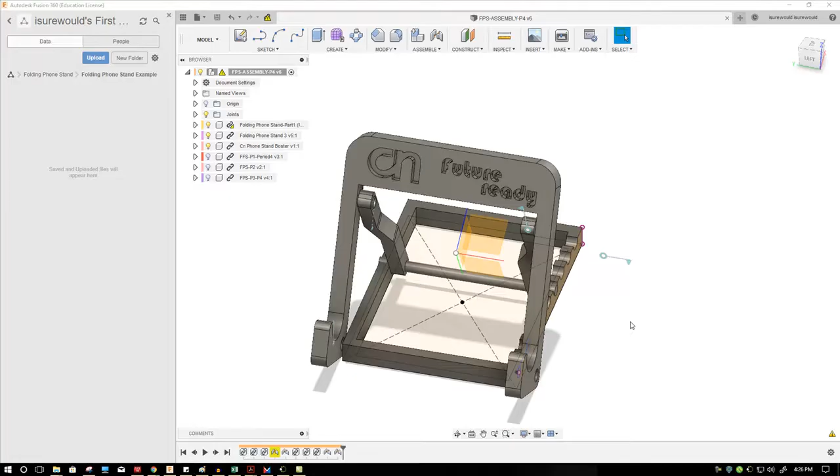Now I like this because it's very doable and it can be customized a bit, and all my students seem to be able to make one. And then of course after that it could be 3D printed on a 3D printer.

Alright, so let me close that one out. Now for this project we're going to make three separate files.

So we're going to start out by doing the sketch rectangle, center point rectangle. Now it's best to create this on the top plane, so I'm going to click on that, and now design from the center.

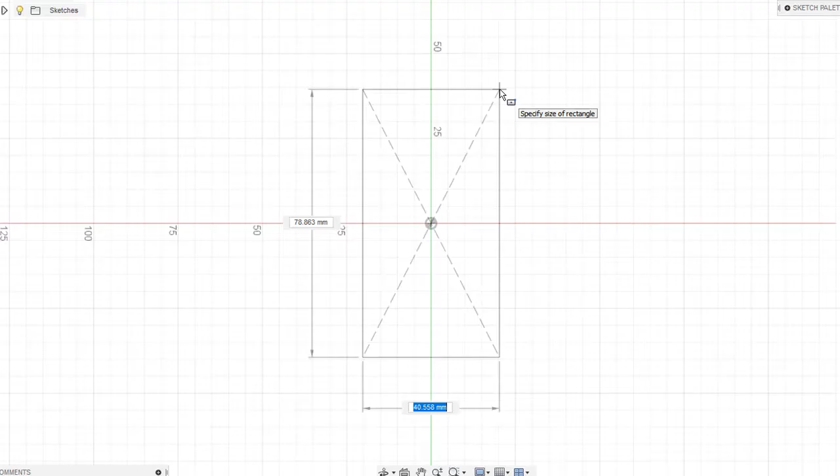Now this one we're going to make it 110 high and 79 wide. So I'll start with 79, press the tab button, jump up to 110. That's my initial shape.

Now we're going to choose the offset tool. You can tap O on the keyboard for that as well. And I'm going to offset it on the inside of the first rectangle. That's the main thing to know, and this is going to offset 5.

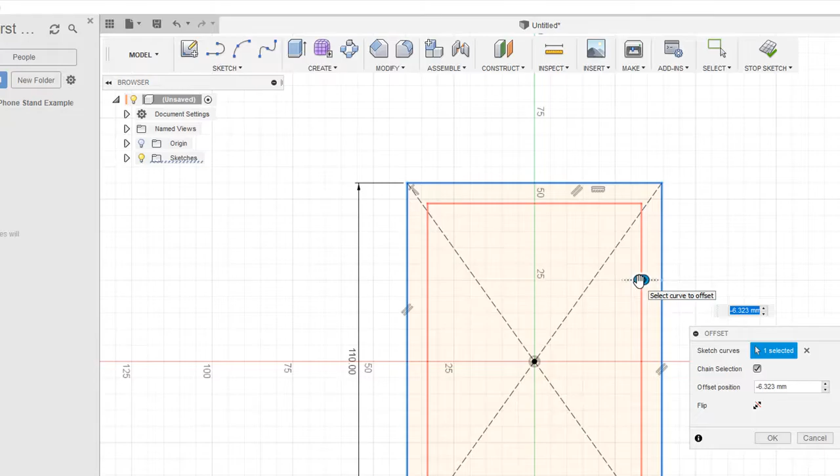Sometimes the 5 and the -5 are different. Often when my students do it, it's a +5. Just make sure the offset goes on the inside of the rectangle.

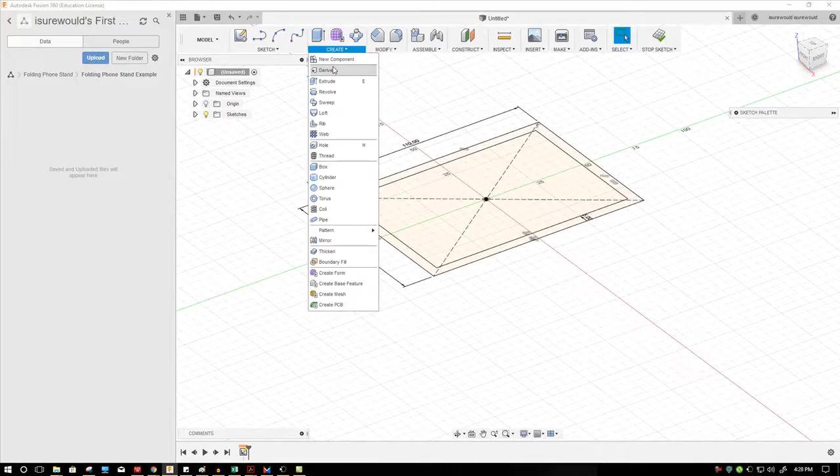From that we are going to start our extrude. Choose the create extrude button, and extrude this shape up 9 millimeters.

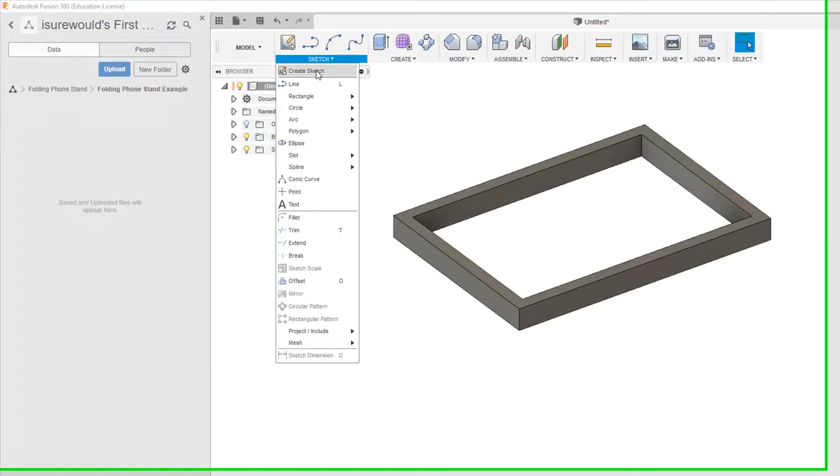At this point we're going to design a new sketch on the side of this shape, so I'm going to come down to the circle tool, and I'm going to start out with a 2-point circle. Click on the side of this shape, and then I'm kind of going diagonally down across this for the circle.

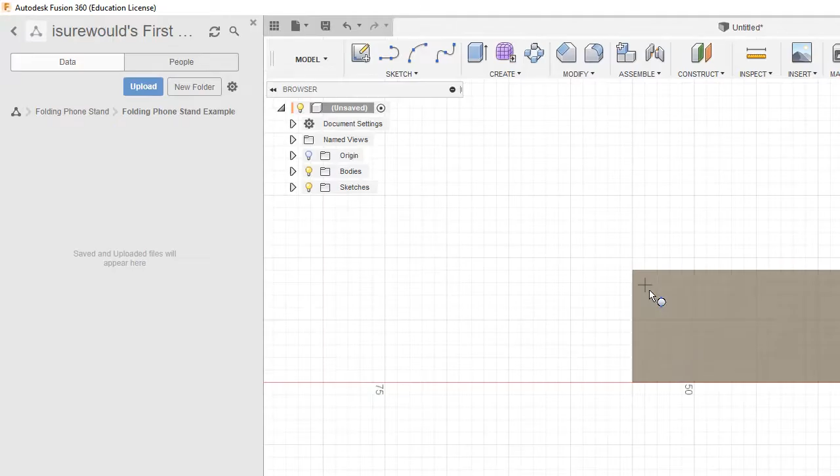So I'm bringing it down about 2 of the millimeters. I can tell because it's 2 squares there, and then I want this one to be 5 millimeters as well. Now I'm going to make another circle using the center diameter circle.

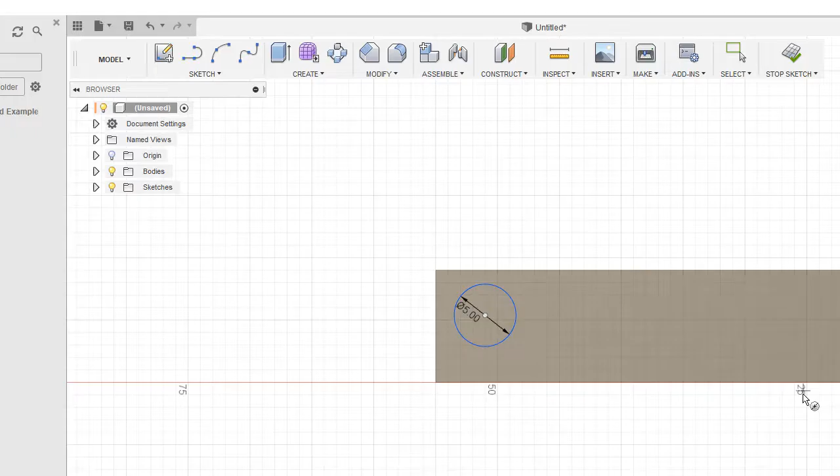This one I'm going to bring over to about the 25 millimeter mark and then bring it up. This is going to be a diameter of 7 millimeters. And notice it's right, the center is right on the edge of the shape. So you'll see that.

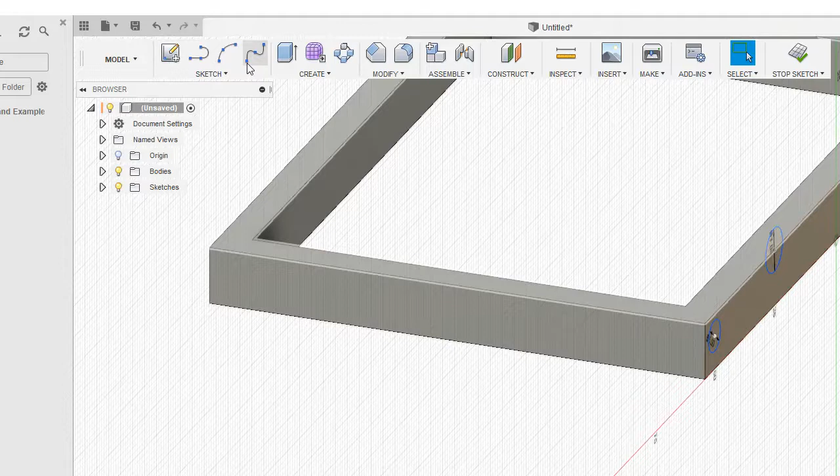Okay, from this point we're going to extrude first circle out 5 millimeters. Click OK. Sketches tend to automatically turn off when you extrude, so check that sketch, turn it back on if you need to.

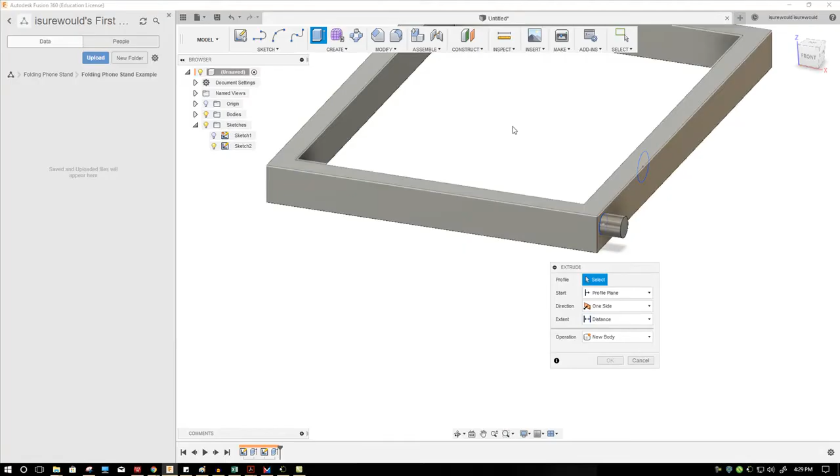This second sketch I'm going to extrude cut now across and make a notch.

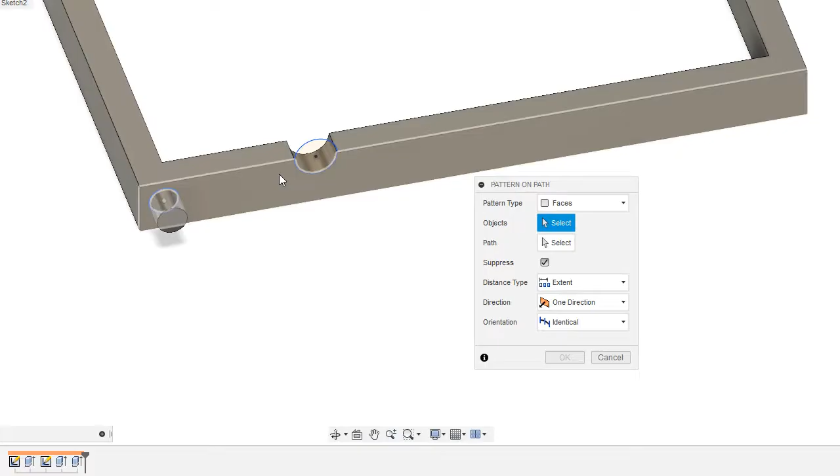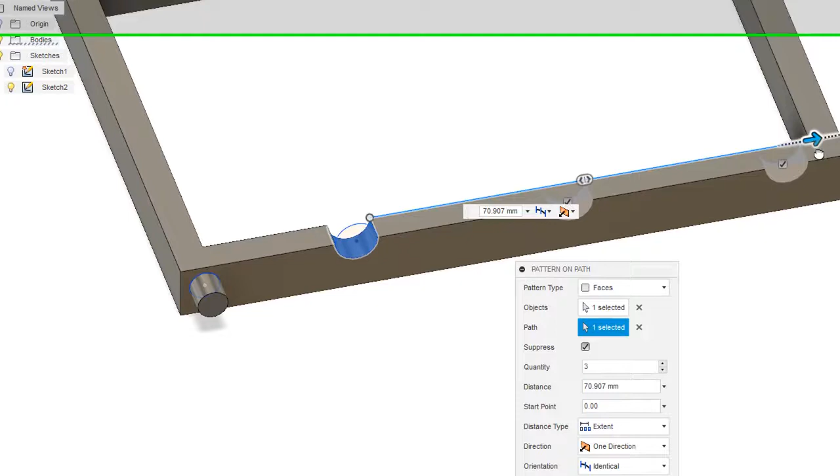Okay, from this point we're going to do a create a pattern on a path. I'm going to leave it set for faces and then select the objects that I want to pattern. Select the path. Prefer to use this inside line, and then drag it this way. Now if I leave it the way it is right now, it's going to make 3 notches. I want more than that. Let's try 9, and then it'll cut 9 notches out of that.

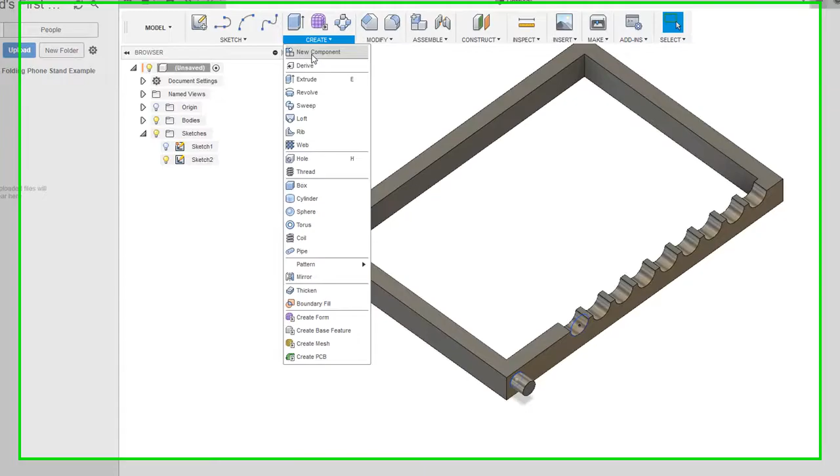Alright, at this point I can take and I'm going to go ahead and mirror these shapes to the other side. So I'm going to do create a mirror and select all the faces that are going to be affected. Unfortunately, this is the best way to do it. I normally like to minimize the number of items to select, but this is the best way.

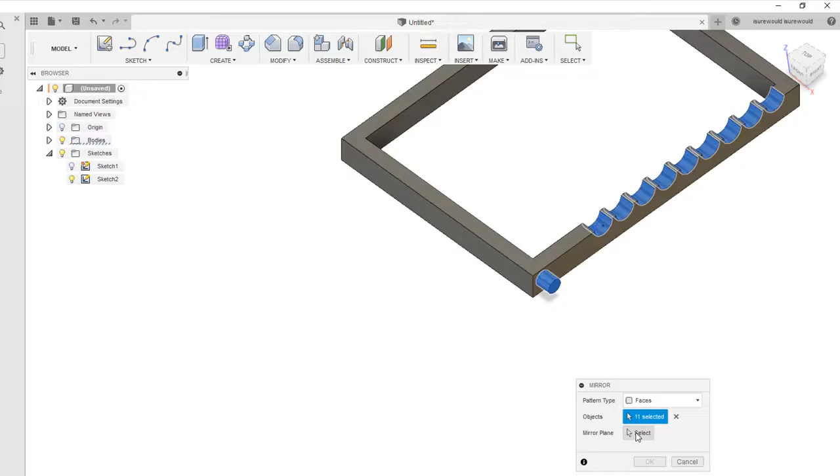Select the mirror plane, and you'll see the origin shows up. This is why we are using the centered rectangle. It allows us to use the origin for our different mirrors. And you can see it copied that to the other side.

From this point, we're going to go to the Modify menu, and we're going to fillet some of the edges. I'm going to choose this edge, and then matching inside edge there, and then the inside edge, and the matching outside edge. It'll actually select through the shape if you just point to the general area where it should be. Round those off.

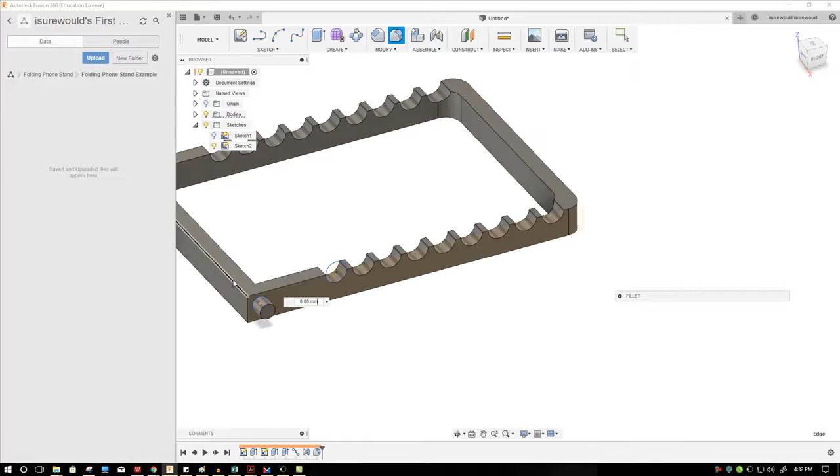5mm should be fine. Press enter. Now I'm going to fillet the rear edge here. Press enter. And part 1 is done.

Let's go ahead and save this. We're going to call this Folding Phone Stand Part 1.

Okay, now we're going to create the Folding Phone Stand Part 2. I'm going to go ahead and save this. Better practice to save it at the beginning than at the end.

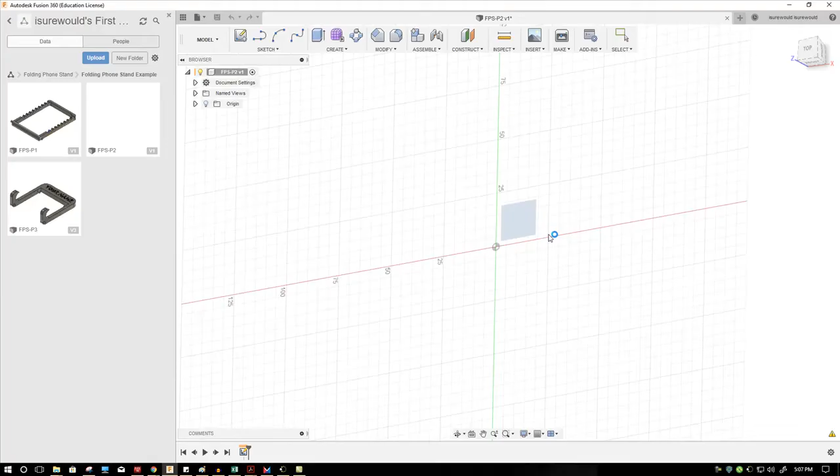Going to use the centered rectangle again and work on the top plane. This time I've done different dimensions in the past, but I find the best dimensions to work with are 80 by 80.

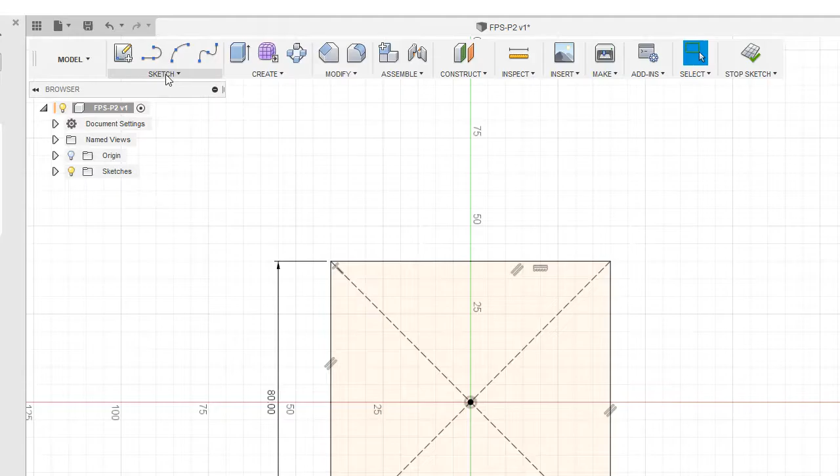We're going to take that, and then do a couple of offsets. I'll choose the offset tool, click on the outside rectangle, bring it inside by 6, do it again, start at the outside rectangle except bring it in by 12.

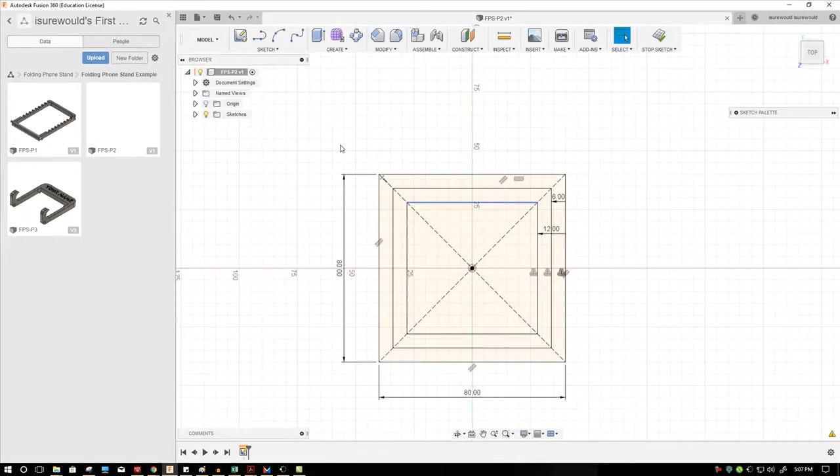Then we're going to use some 2-point rectangles to divide off some sections that we need to change. First we'll do a rectangle across the whole top. It's going to be 38mm tall. You can see that there.

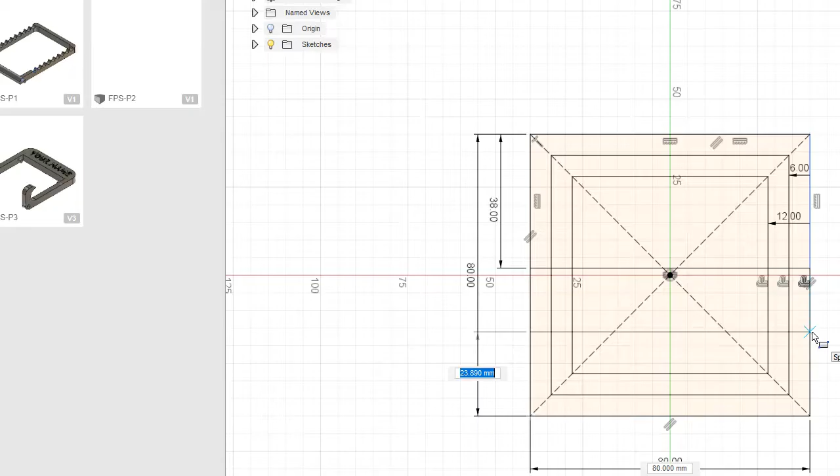We're going to make another rectangle here across the bottom. This one is going to be 22mm. And we'll set that aside.

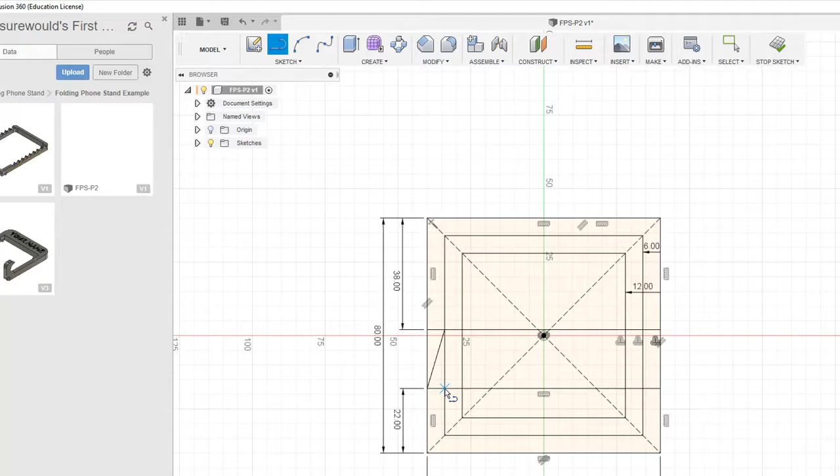And then we're going to use the line tool, regular line tool there, okay, and we're going to connect corner to corner from these rectangles we just made.

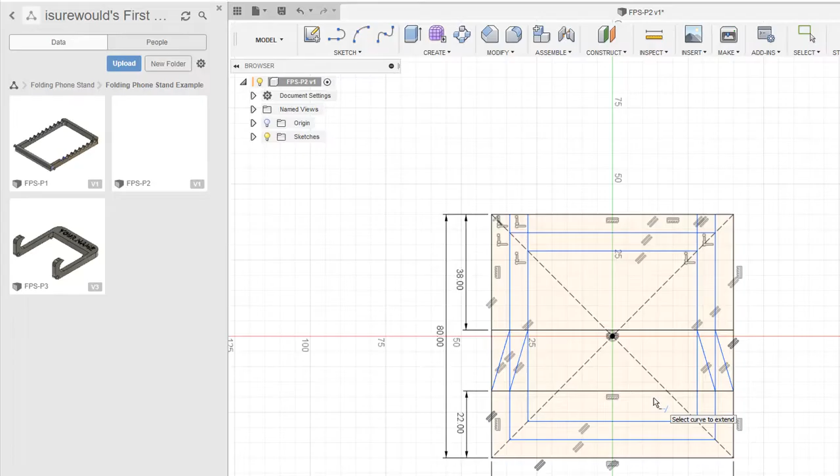After making those connections, we're going to use the extend tool to extend some of these lines. So let's extend this line first, continue it up, extend this line up, same thing over here, and we're going to extend this line down to the bottom and this line down to the bottom.

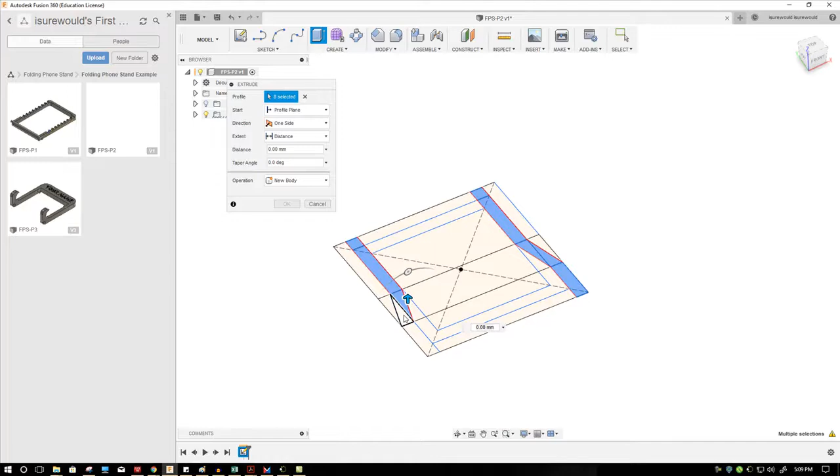Once we've done that, it's going to make it easy to extrude the shapes we need. So we're going to do these shapes, same thing on the other side. Extrude these up 8mm from there.

At this point, I'm going to use the centered circles, center diameter circles, and create some more sketches. Now for this, I'm actually going to design on the center plane here.

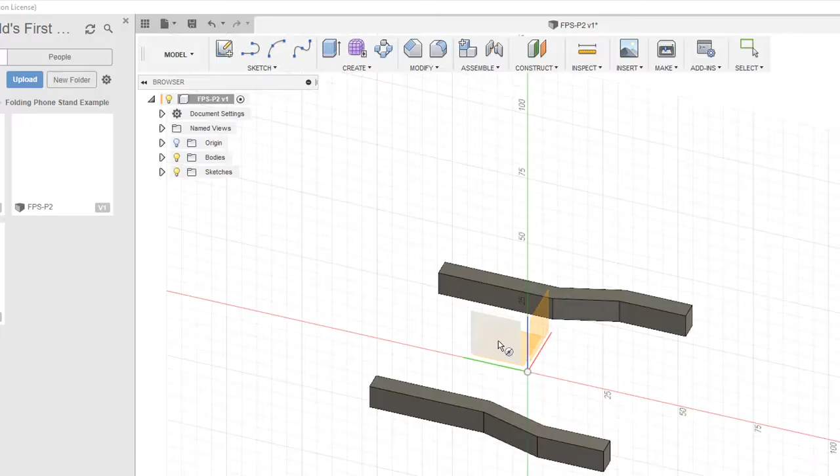So one is going to be 5mm in diameter. Repeat that, and this one is going to be 6mm in diameter. Now that's a little too close to the edge there.

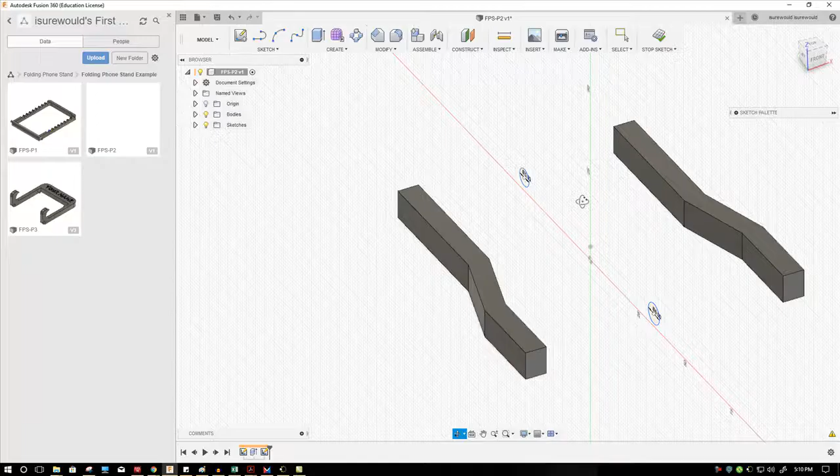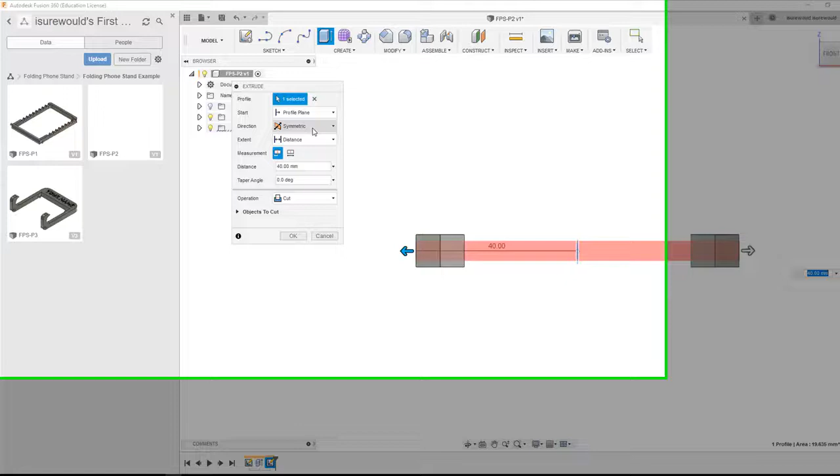Okay, so the 5mm circle is going to be an extrude. We're going to do a two-sided symmetric extrude, and we're not going to cut with it, but what we do want is that we want it to line up with the edge, the bottom edge of our part. So I'm going to change that from a cut into a join, and you'll see that makes a post.

I'm going to do this again with the extrude. This time I need to find my sketch. There it is. This time we're going to go ahead and do a symmetric extrude again, except this time we are cutting. And it'll just automatically cut when it hits those parts on the left and right.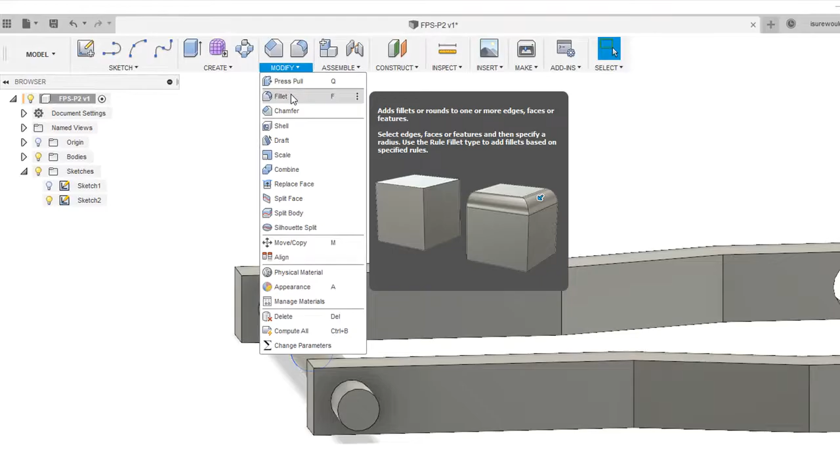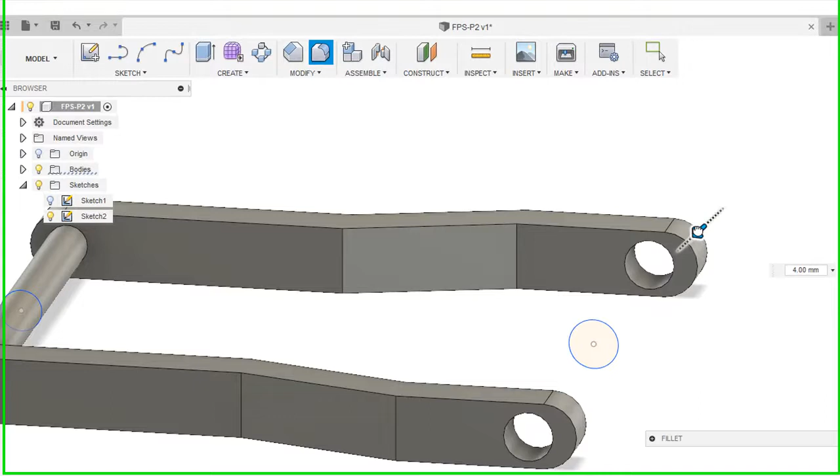Okay, now this is going to be a rotating part. These edges here are going to be a problem, so what we need to do is modify those with a fillet under the modify menu, and we can just go ahead and should be able to select these all together, do them at the same time, and you'll notice that they change on the top and bottom. Click enter on the keyboard, and that part is pretty much done.

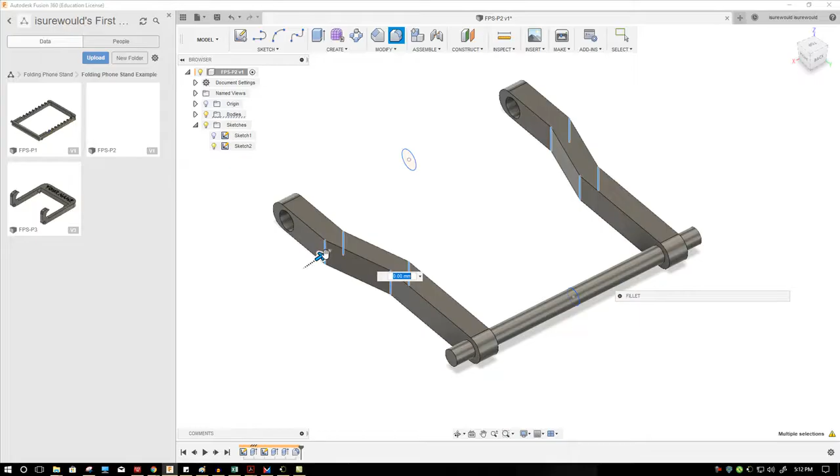Now functionally it's fine, but sometimes I like to make it a little more rounded, and I'm going to choose to fillet these inside and outside edges. When I do that, you'll see it just kind of rounds it out.

Optional. I just like the way it curves like that.

Okay, so let's go ahead and save that part. And we're done with part 2. On to part 3.

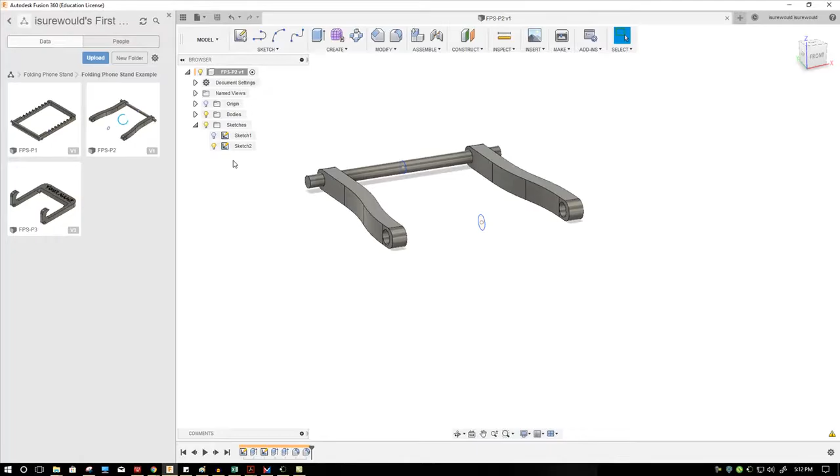Now we're going to start our third and final part. I'm going to go ahead and save this file. Folding phone stand, part 3.

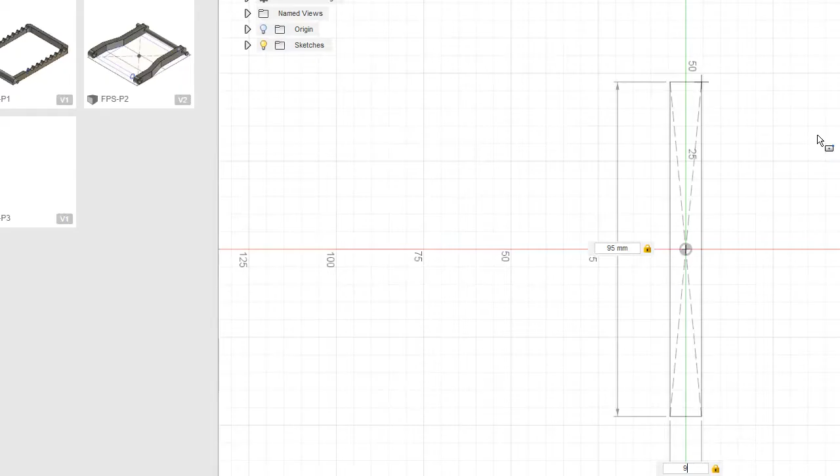Okay, and for this one, we are going to be making another centered rectangle. Start with a rectangle, center rectangle. Work on the top view. First one is going to be 95 wide, and I take, yes, 90, yep, I got that backwards, 95 wide and 90 high. So 90 high, 95 wide.

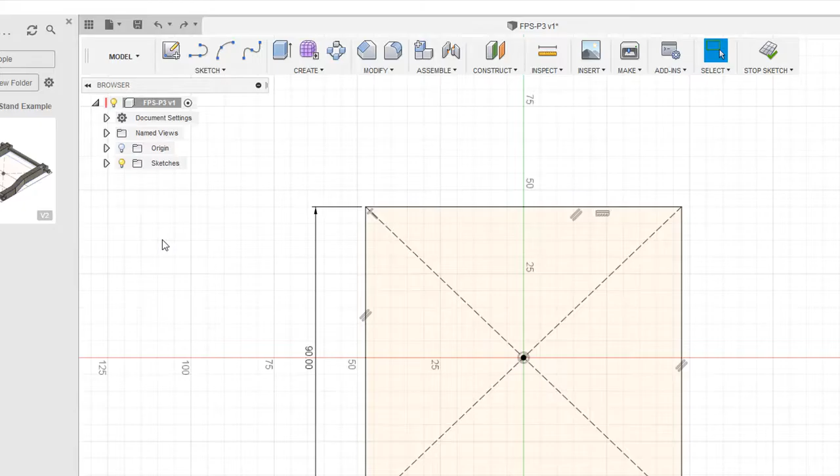I'm going to repeat that, center rectangle. Take that back, I'm not going to repeat that. I'm going to do an offset. So let's go ahead and do a sketch offset.

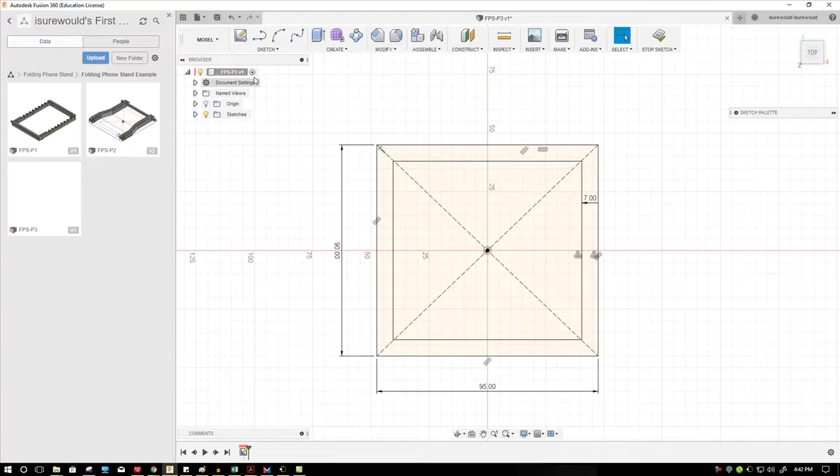Offset that by 7. Make sure it goes inside the other rectangle so you don't change the outside dimensions of the part. From here we are going to use the extend tool. Extend this edge right here all the way to the bottom there. Extend this edge to the bottom, and now we're ready to extrude. I'm going to quick save that.

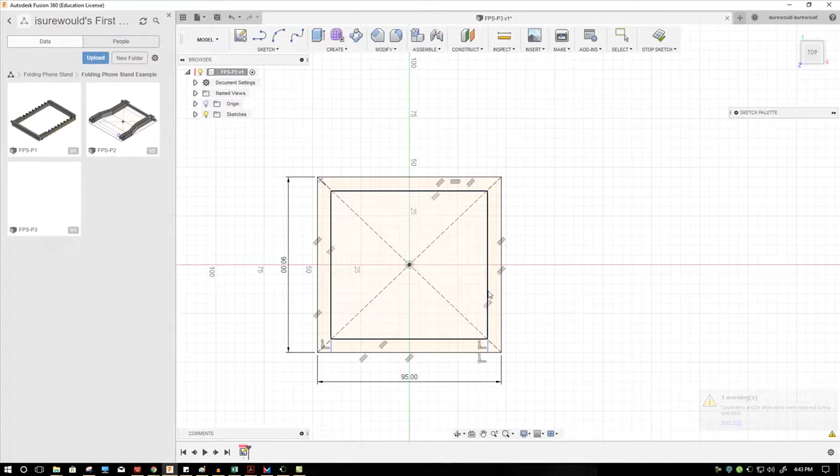Okay, so home view for extruding, we're going to extrude this part up 10.

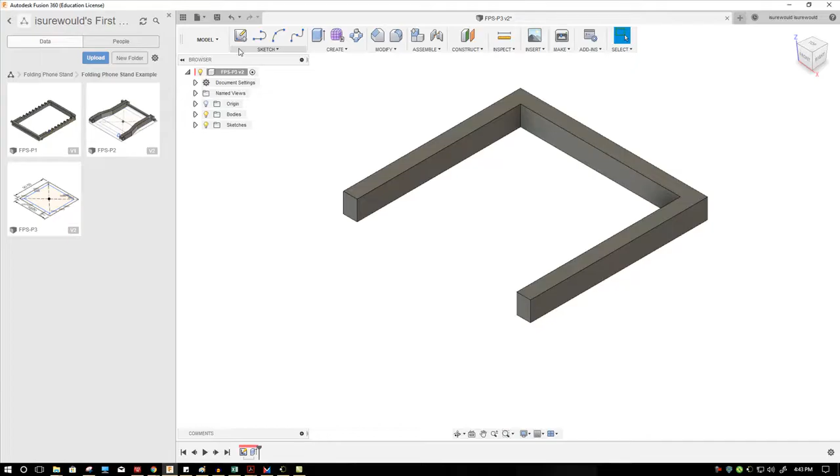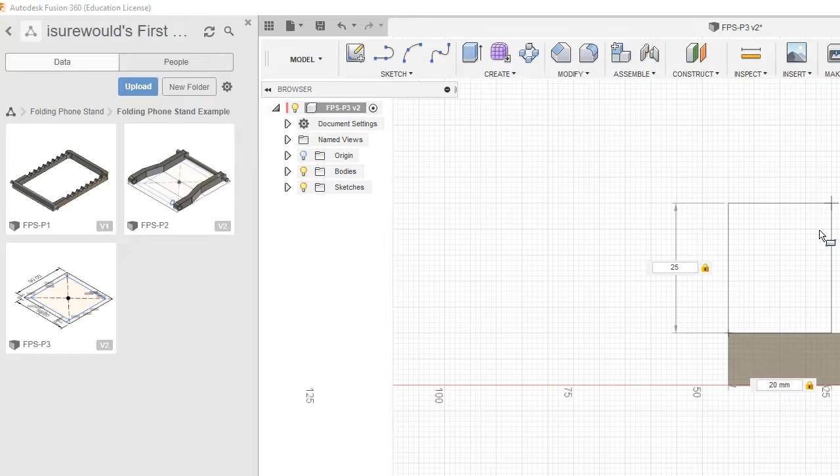Now we're going to design a new sketch on the side of our part 3. So I'm going to choose my 2-point rectangle tool, click on the side of our part. I'm going to make a rectangle. This rectangle is going to go over to the right 20 millimeters, and it's going to go up 25. You can jump fields by clicking the tab button on your keyboard.

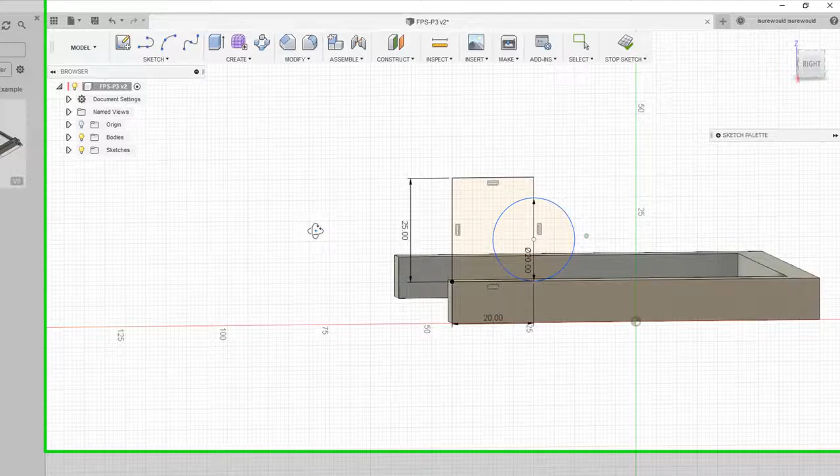We're going to add in a 2-point circle, and starting in the corner, click up, and we're going to bring this up 20 millimeters. Now that's the outline for creating the cradle for the phone. So I'm going to extrude that now.

And just bring it over so that it's the same width. There we go. Click OK.

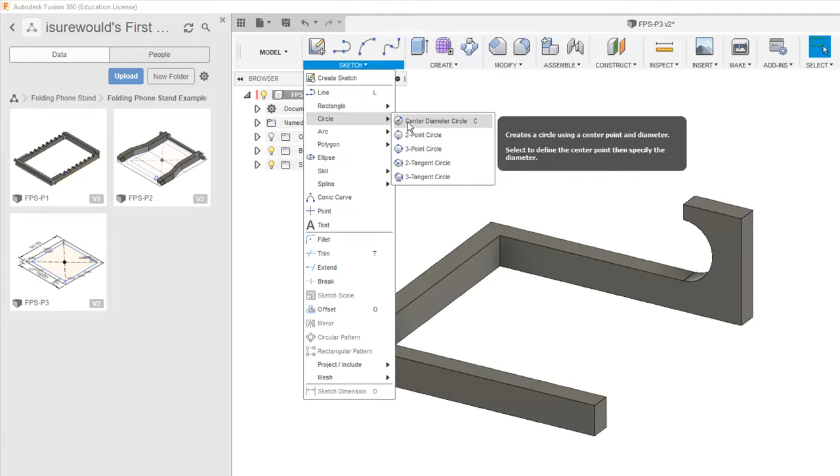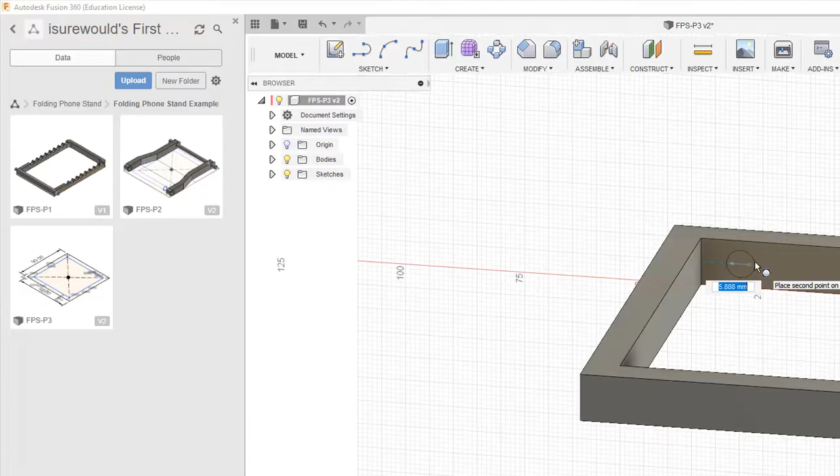Alright, so on this point we are going to add in some more circles that we use for posts and holes. So I'm going to create a 2-point circle, which would be our best tool for this. Click on this inside edge. I actually prefer to look so I can see where I'm working, because I need to create it inside this, so we're going to center it as much as possible. Leave enough space so that the other part does not get caught on the top there. And this is going to be 5 millimeters.

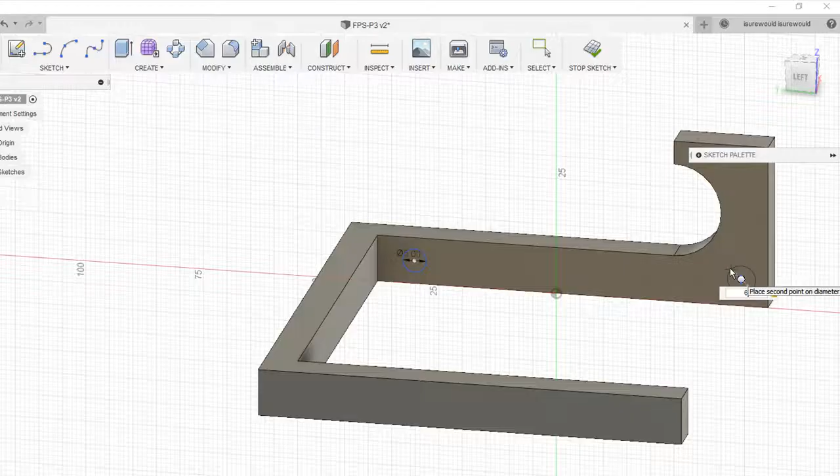Okay, repeating that circle, 2-point circle. We're going to bring this down to the bottom edge and design out of this corner like we did that other time, diagonally bring it up 6 millimeters. So this bottom circle is used to cut. This top circle, which disappeared, is used to create a little post here that's 5 millimeters long.

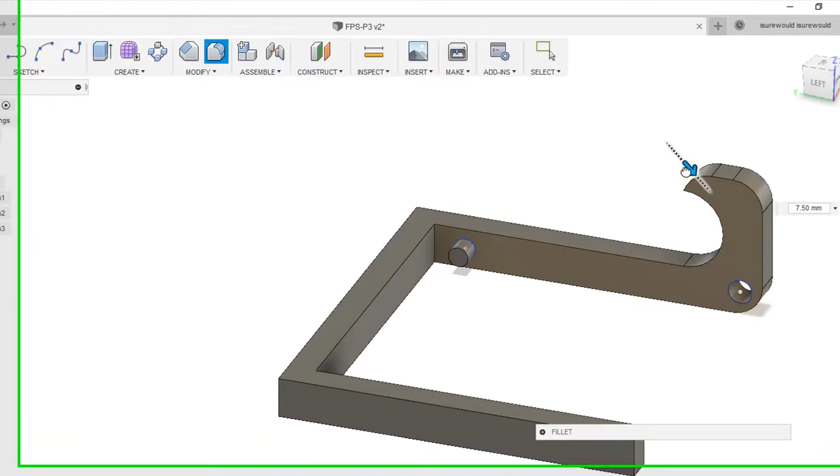Now, might as well just work on cleaning some of the things up. So we're going to choose Modify Fillet, and what I like to do is have a nice rounded edge all around this, even up at the top here. Let's see how we can do with this, especially near the bottom. This is a rotating part right here, so you want it to have a nice rounded edge there. And I like that, so I'm going to click Enter.

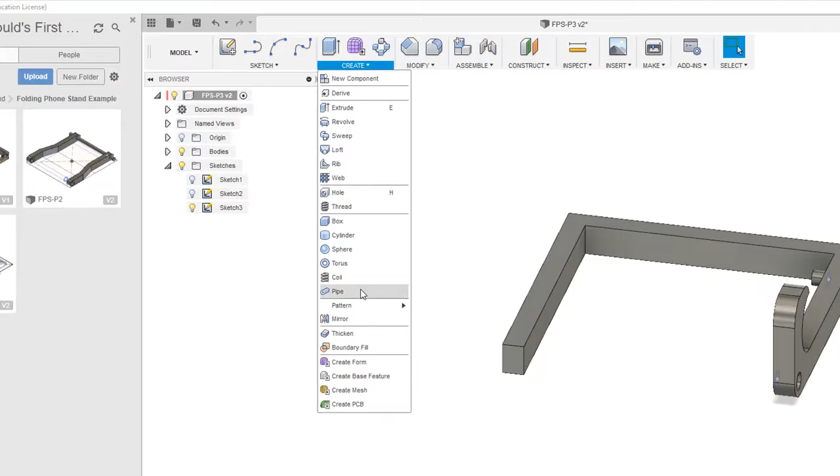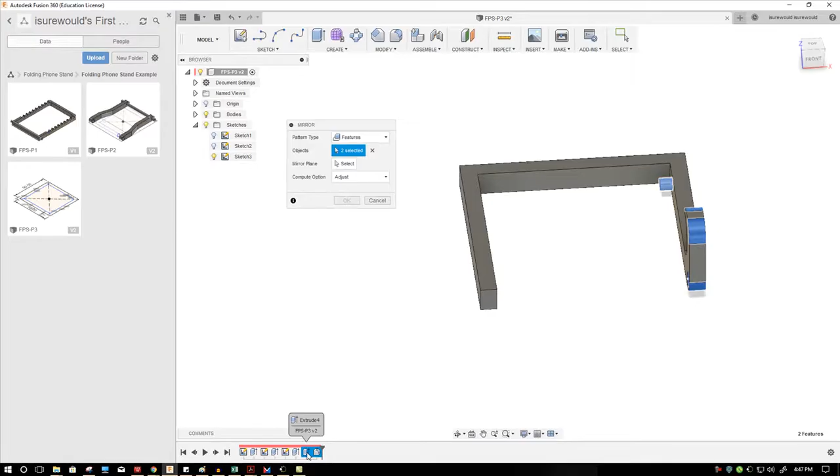Now, rather than redesigning this again on the other side, we're going to use that mirroring function that we did earlier. So let's do Create a Mirror. We could choose faces here. I'm going to go ahead and choose Features to mirror. So when you choose Features, then you can select them from the timeline as steps that you did. So there's my fillets, there's my posts, there's my cut I made, and the only other thing is I need to mirror that ledge as well, or the phone ledge, I guess you could call it.

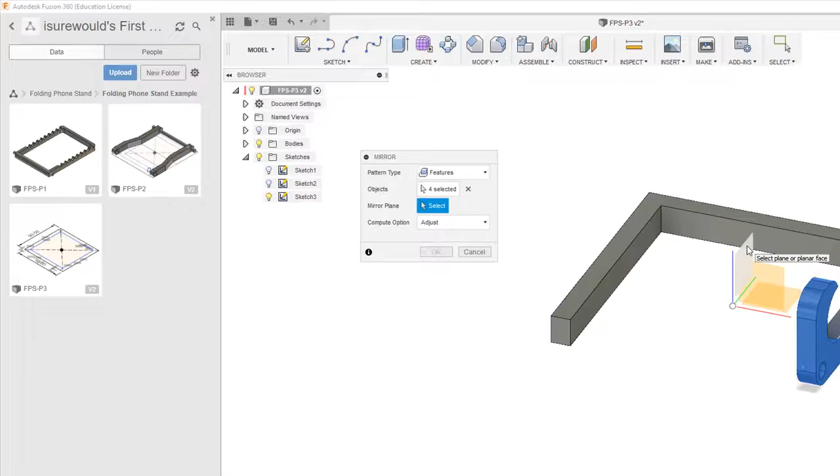Alright, a mirror plane, selecting that should be the center plane that divides the part in two, and let's click OK. So there it is on the other side.

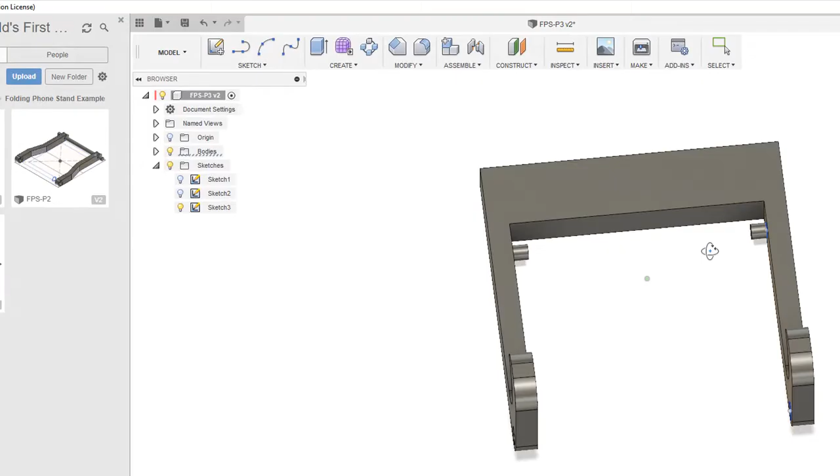Now this is where I like to have my students customize it. So at this point I find it best to bring up this into more of a billboard, add about 15 millimeters onto that, and then this is where we can make it personal. So there's a lot of ways to do this. You could draw a picture, you could make a design, you could do whatever you want. Just to keep it simple though, I'm going to use the text tool.

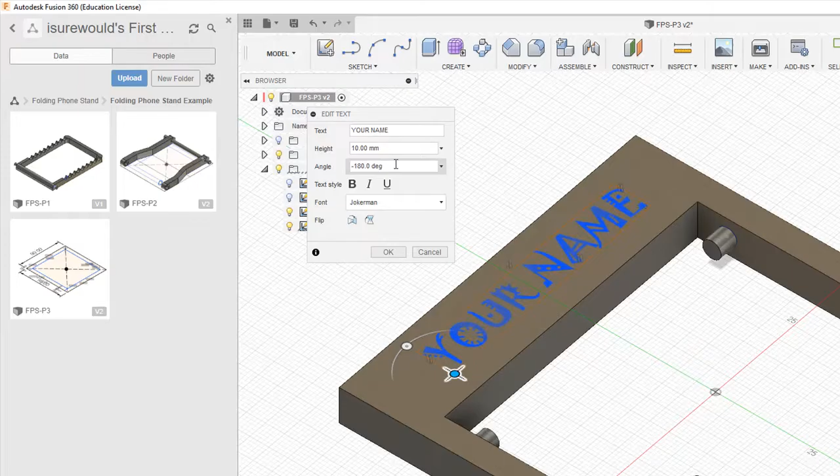Okay, so your goal is to just find a font that fits nicely, takes up a good amount of space on your billboard there. I will warn you right now, not every single font seems to extrude for some reason. I don't know why.

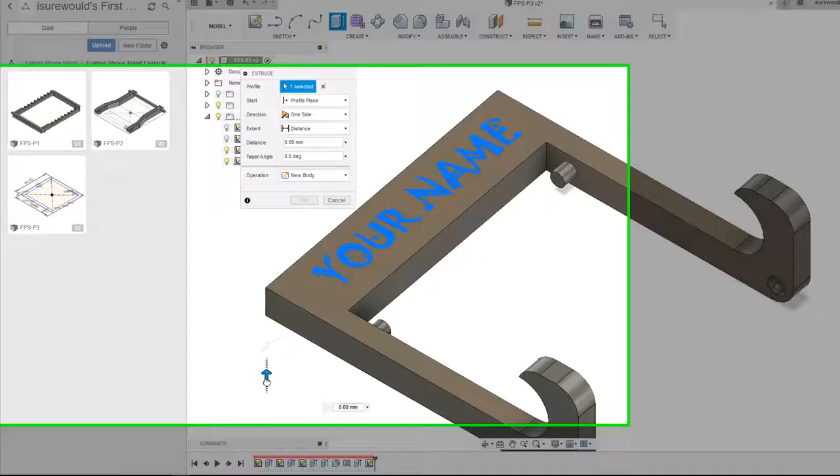The other thing is I would extrude into your billboard rather than out, because remember there's a phone sitting against that. Now you can do two things. You can cut all the way through, but if you cut all the way through, things like the inside of an O, inside of an R, inside of an A are going to fall out because there's nothing holding them in place. So not a bad idea to not go all the way through.

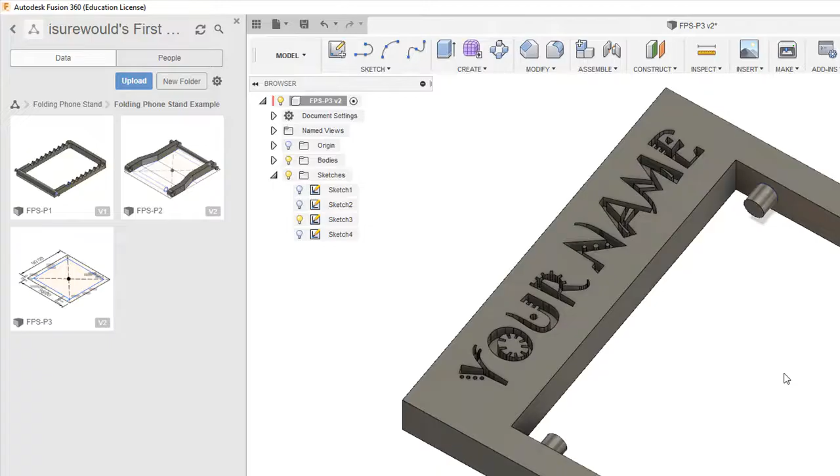The other thing I would like to do is fillet those top edges, to kind of match the feel of the rest of it. And once you've done that, you have made your part 3.

At this point, any of these parts could be saved as an STL file, which is a file we can 3D print. But before I do that, I want to make sure that they're correct and will fit together. So I'm going to save a new file called this folding phone stand assembly.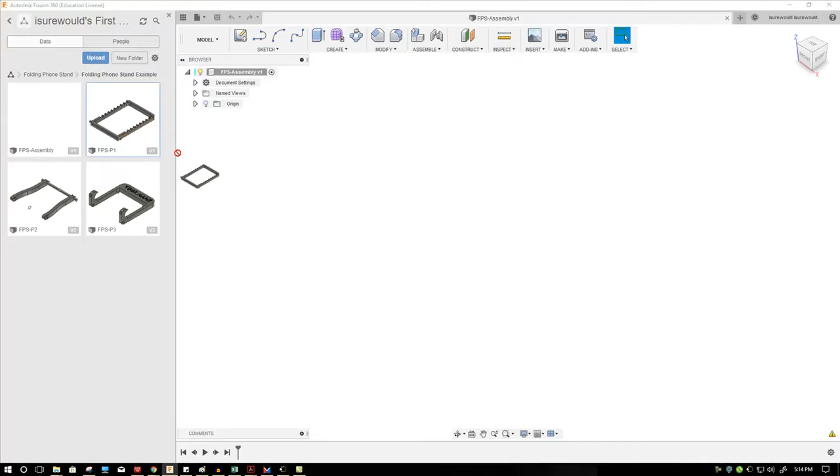This assembly is a place, a file where we can assemble these parts digitally to see if they work. So I'm going to grab them one at a time, drop them in, and they're going to be converted into components.

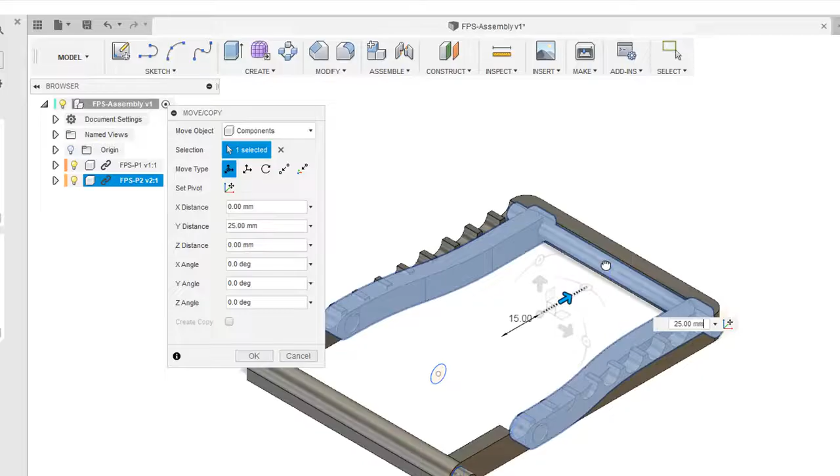That looks fine. I'm going to give myself a little more space. Do it again with part 2. And if you happen to have any sketches turned on, they will show up in the assembly. Generally that annoys me, but I'm going to just ignore that little sketch there. And then the third part.

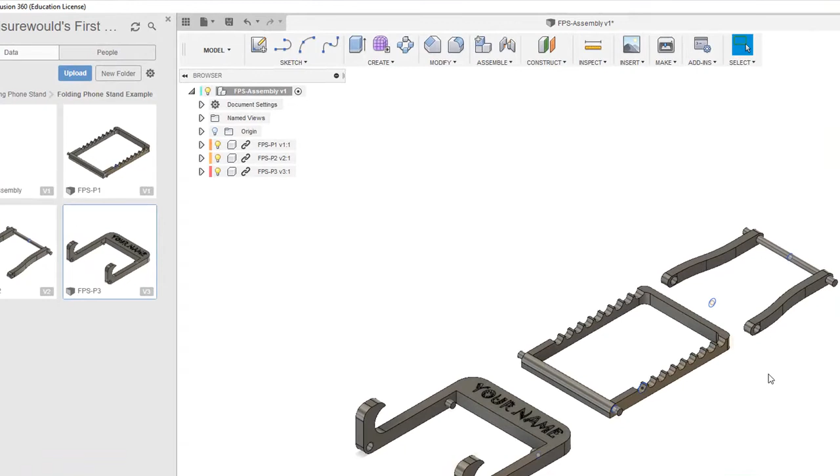Click OK. Now, in order to see if they fit, they look like they're going to be okay, but let's find out for sure. We're going to do what's called assemble joints.

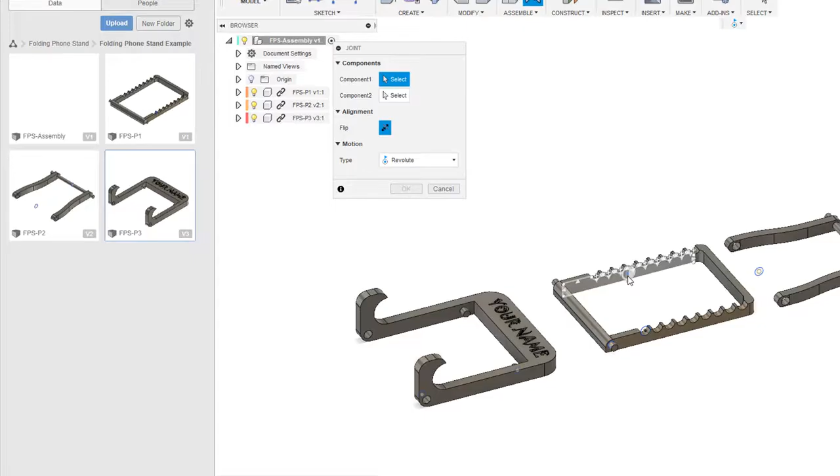So first we're going to select the part of a rotating joint that moves. This part I want to stay stable, so this is the part that is going to be movable. I'm going to go ahead and pick this inside circle right there, and that's going to connect to this post over here. You'll notice it automatically moves.

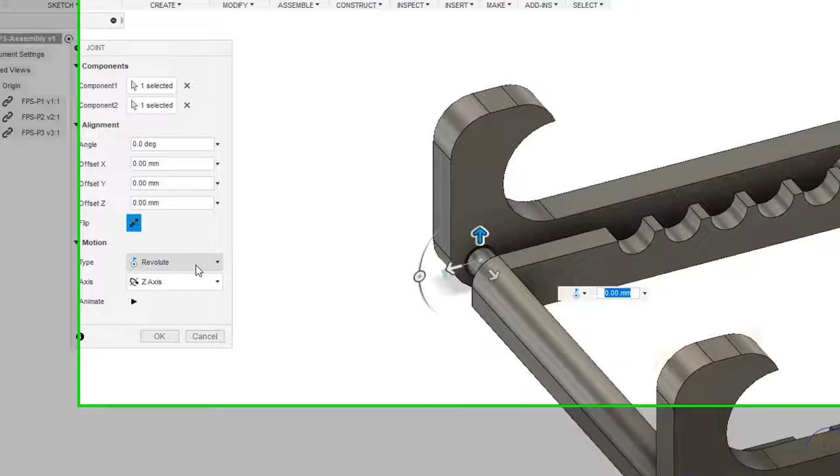Now it needs to be set as a revolute joint, and then you can grab the handle to rotate that. It's not necessarily positioned exactly correctly, so what I'm going to do is slide this over, zoom in, get the spacing right on both sides. Looks good, so far so good.

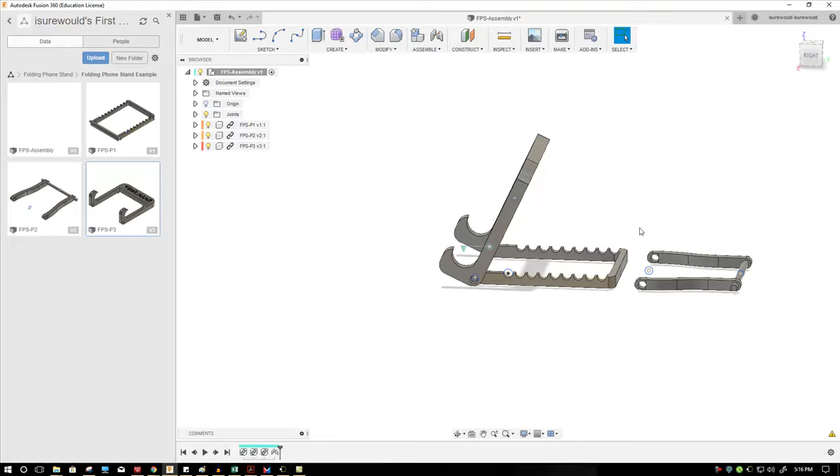Okay, now let's check out the kickstand. So for that, we're going to assemble the joint on that, and I'm going to connect this circle over here up to this post up there.

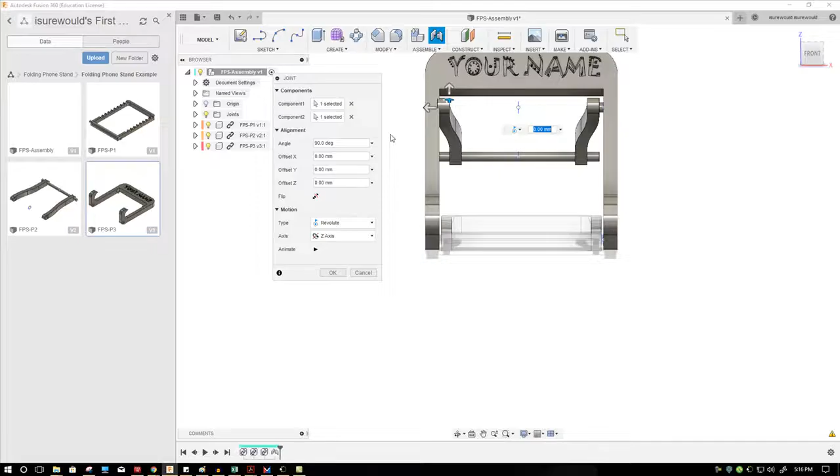Looks pretty good, so I'm going to take and slide this over a little bit. The more you zoom in, the more detailed you can be with your adjustments. Still need a little more. I think there's about a 2 millimeter gap in there.

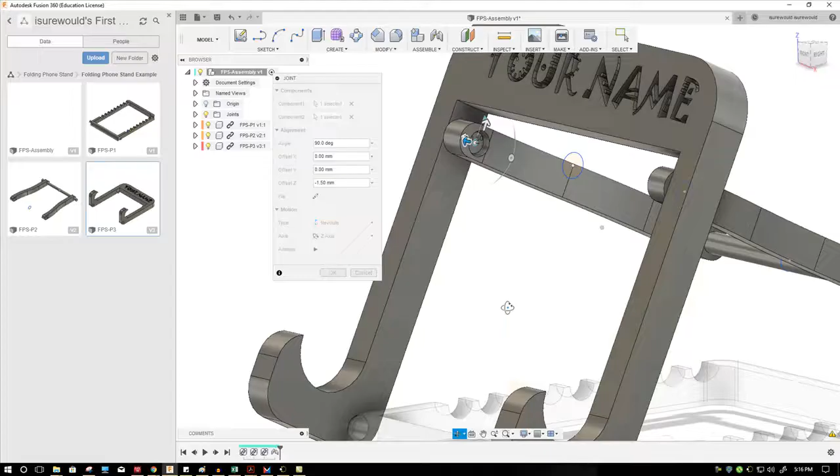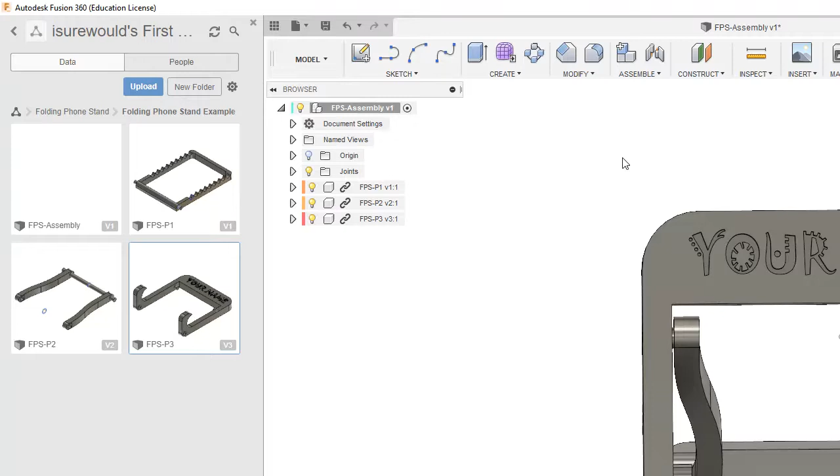Okay, evened it out. The other thing I want to adjust is that angle, so I'm going to grab the handle and slide that down. Click OK. So at that point, I've confirmed that the parts indeed will fit together when they're created, and that will be your functional folding phone stand. So for this, I'm going to click Save and OK.

Now, as far as 3D printing them, let me go ahead and open one of these. You would need to convert each of these files into a separate STL. I mean, technically, you could 3D print them all together, but I don't think that's the best way to do it. You'd want them flat if you can do that.

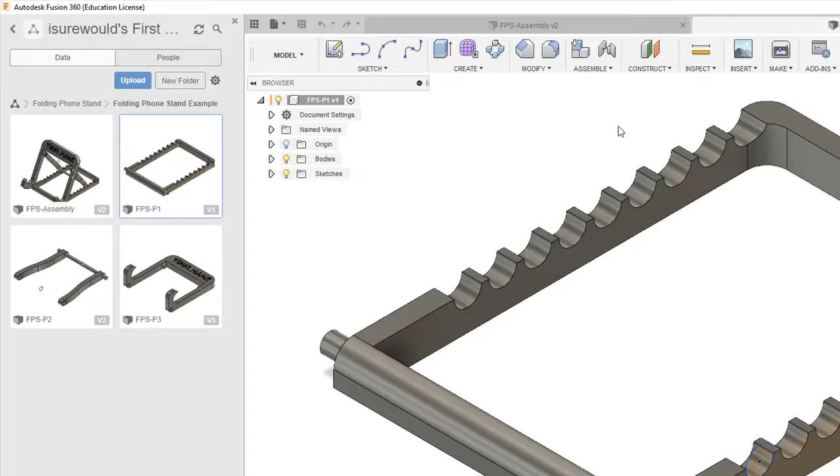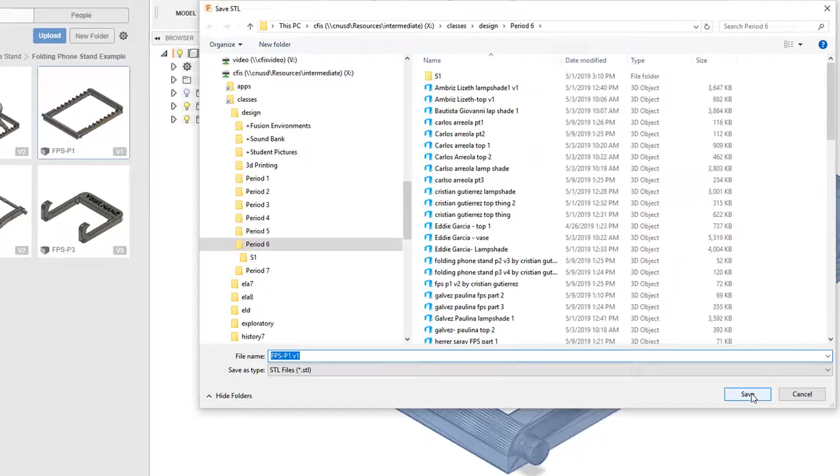So we're going to go to the top level, right click, choose Save as STL, and preview the mesh. I like to preview it. Breaks it up into 26,000 triangles. Click OK, choose my saving location and click Save. So that's how you STL those files.

Do that each time, and then those are the ones that you can send to your 3D printer, however you do that on your particular 3D printer. That's it.